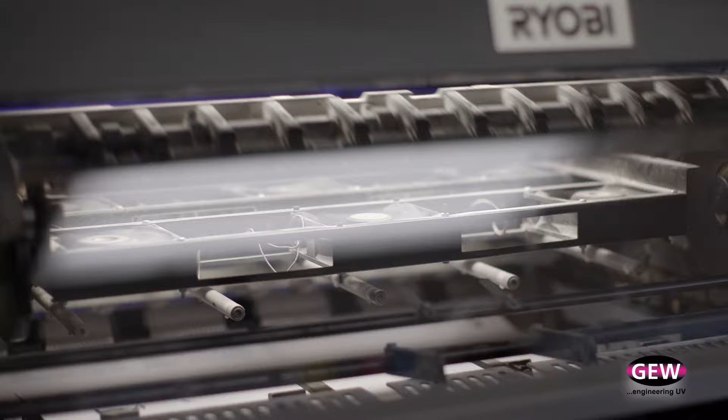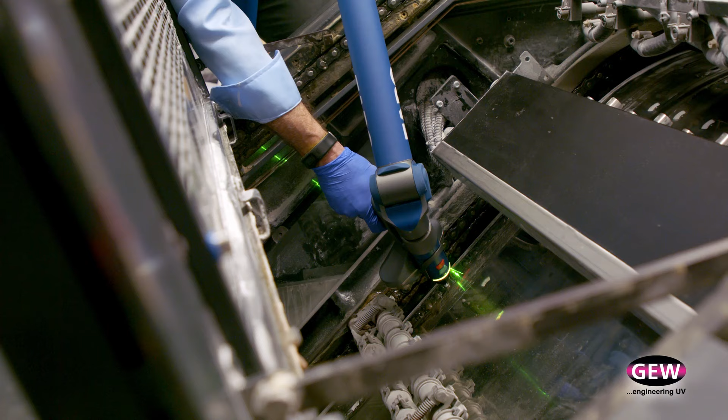In this video today, we're going to be looking at GEW's retrofitting process, and we're going to be showing you in a lot of detail the meticulous measurement, planning and engineering that goes into making sure every UV system retrofit is right first time.

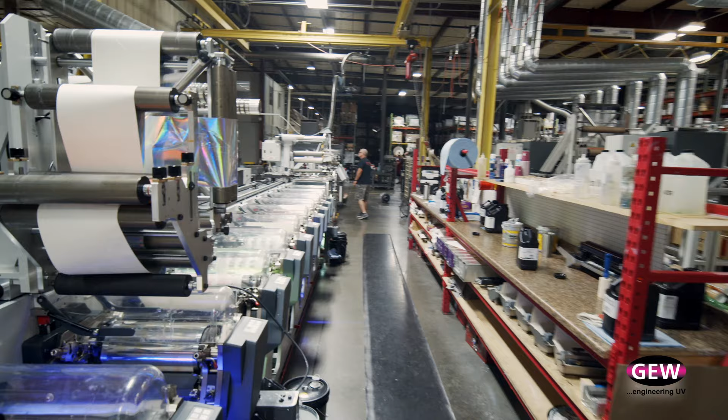At GEW, we understand that a new UV system can have big benefits for a customer's printing machine, but the installation process itself can be extremely disruptive and can cause significant downtime on a machine and loss of revenue. So GEW's retrofit process is designed around ensuring that the downtime on your machine is at an absolute minimum. We take a less haste, more speed approach so that we spend more time on the upfront engineering to ensure that the actual installation itself is right first time for you.

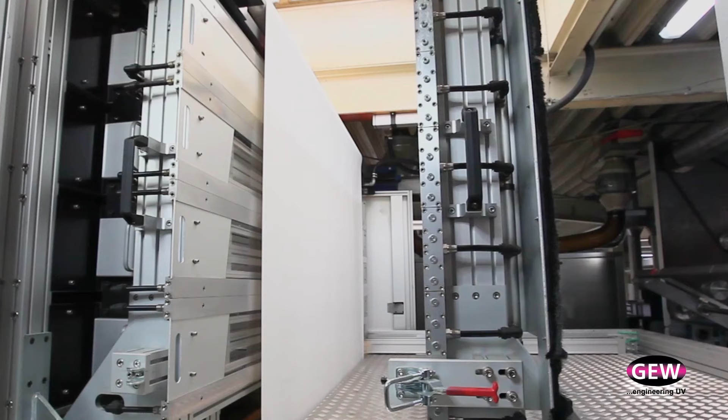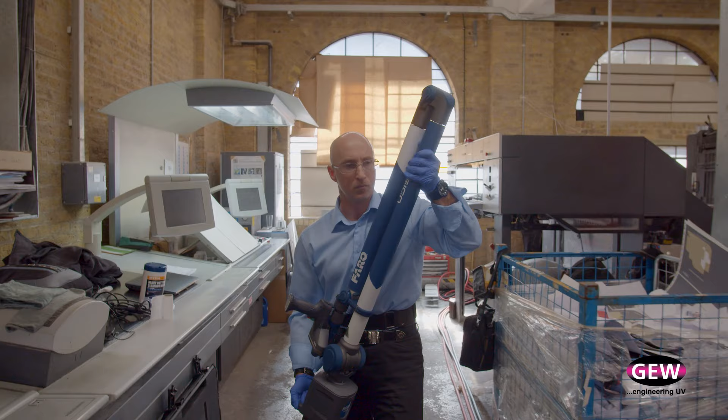After order, the first thing that happens is a GEW engineer from our site here will visit your printing machine with our portable coordinate measurement machine. The FARO scan arm, as it's called, is a laser non-contact measurement device that takes 2,000 points per line and has a measurement accuracy of plus or minus 25 microns.

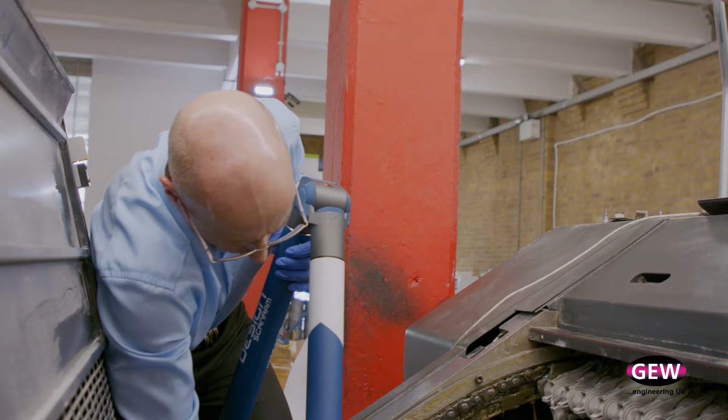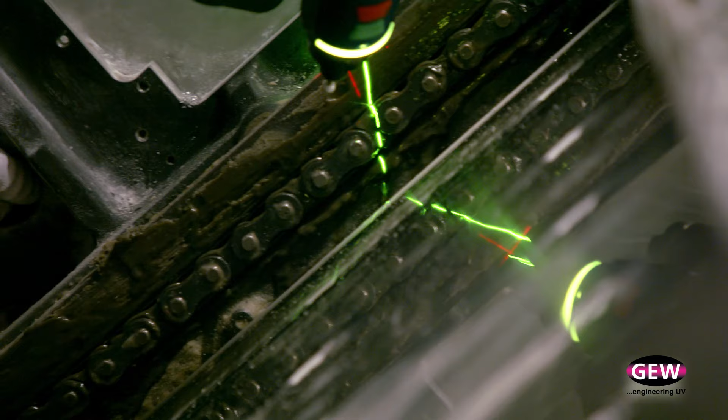The engineer will take that device and scan at high speed and with extreme accuracy all of the components and aspects of your machine which are going to be important to enable us to create and design a custom installation for our UV system. Once the scan is taken, which typically only takes a few hours, the engineer will take that 3D measurement back and convert it into a 3D model on his CAD system here at GEW.

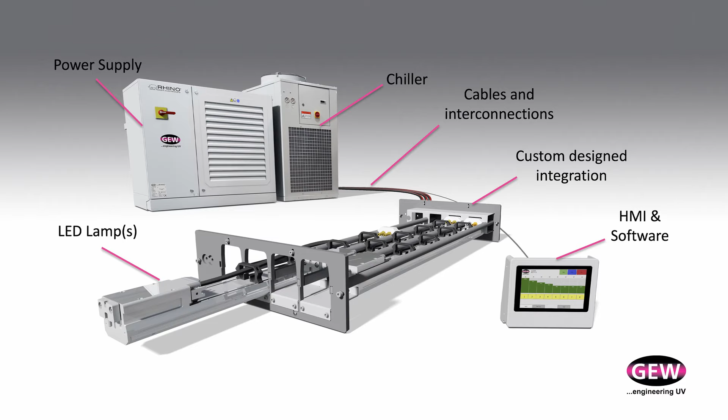A GEW UV system comprises generic components, things like the lamp head, our power supplies, our HMI, cables, cooling systems that we need to actually make the system work, combined with a specific mechanical integration for your particular machine. That mechanical integration kit is designed by our engineers using the 3D model taken of your machine.

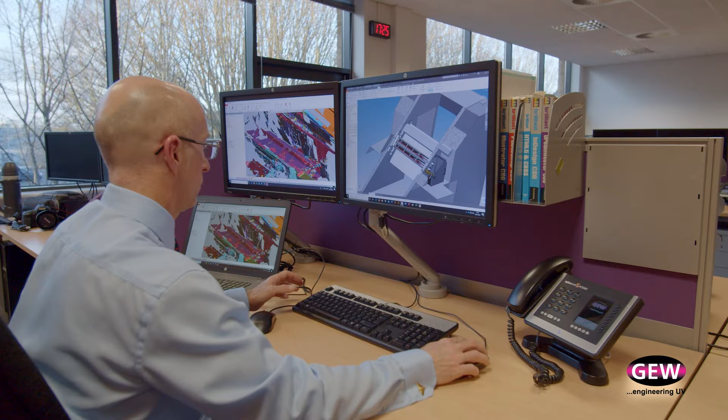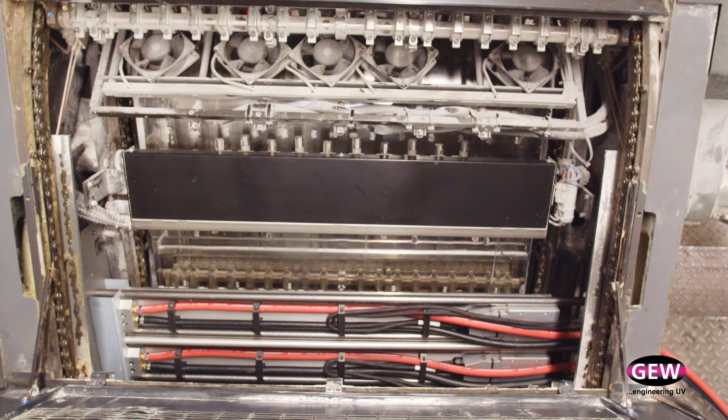Once the engineer has designed the integration for your machine, we take all the generic components, put them together with the specific integration components, and test them as one complete system in extreme detail here in our test department before it is shipped to you. That means when we get to site, we know that the system works, that all the components work together, and we can guarantee that the installation is going to be quick and successful on site.

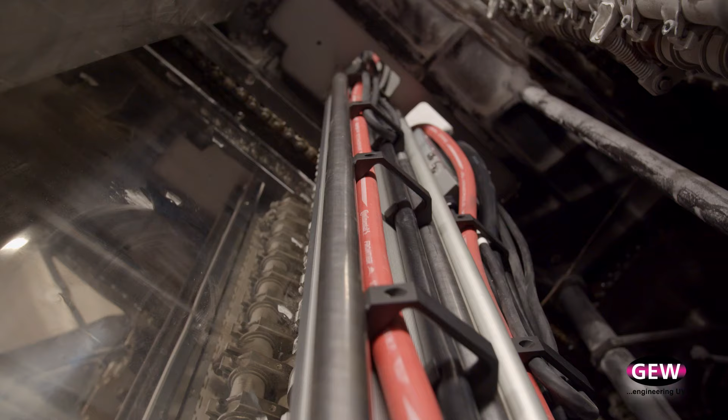We are monitoring your system live in real time. That means if there's ever a problem with your machine, our engineers can log onto your machine and see all the aspects that are important to ensure your press is running correctly.

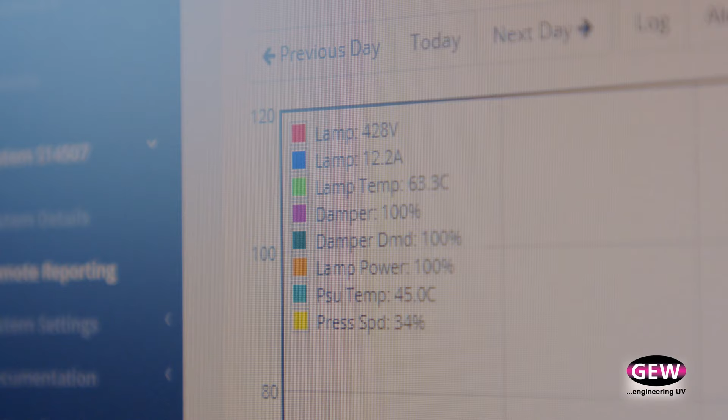What's the voltage of your lamps? What's the current? What's the temperature of the power supply? When did your press start? What speed is your press running? All of these components that we need to know to make sure your machine is running correctly, we can see remotely here at GEW.

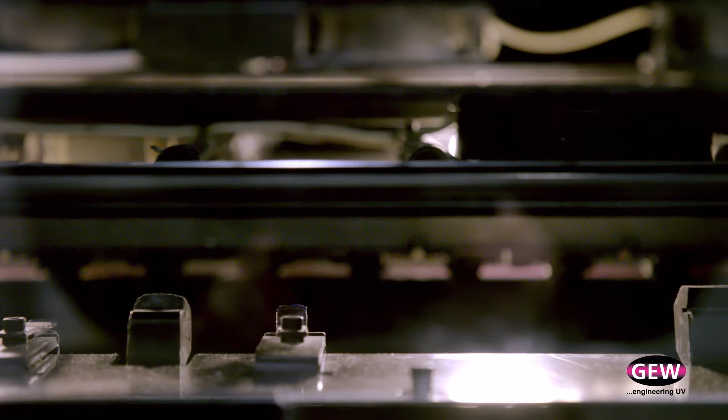And that ensures two things. Firstly, we can take proactive steps to ensure that you don't get downtime in the first place. But secondly, if you do have a problem, we can very quickly and easily understand what's wrong and take proactive maintenance steps without ever needing to visit site. We can do software updates, we can change settings, and this means our service process is much faster and more efficient for you, which again ensures minimum downtime and maximum productivity for your machine.

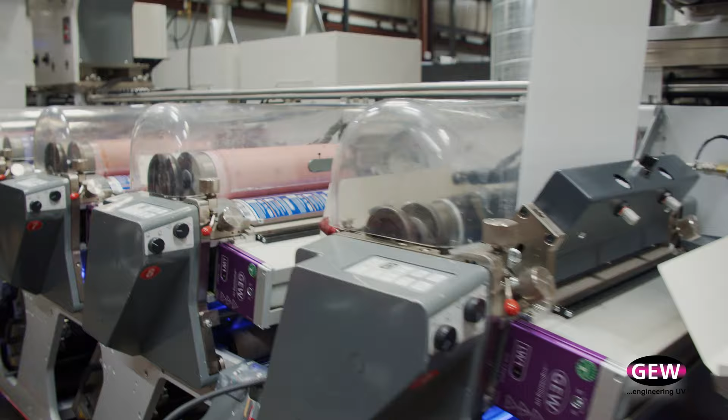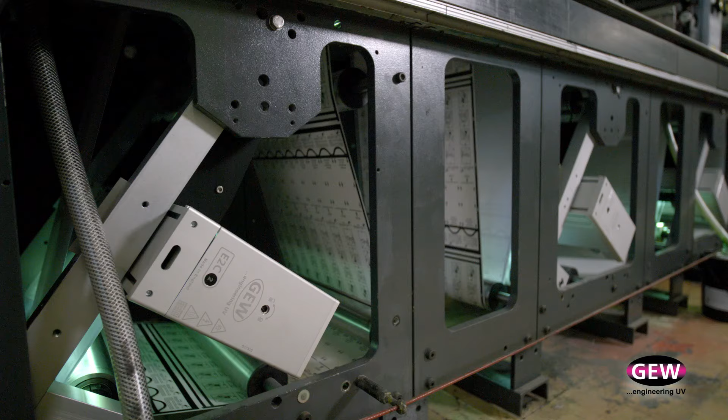Using this retrofit process, GEW is able to mechanically fit our UV systems onto almost any different printing press. You can see here a whole host of different applications and customer projects where we've been able to make a successful installation right first time.

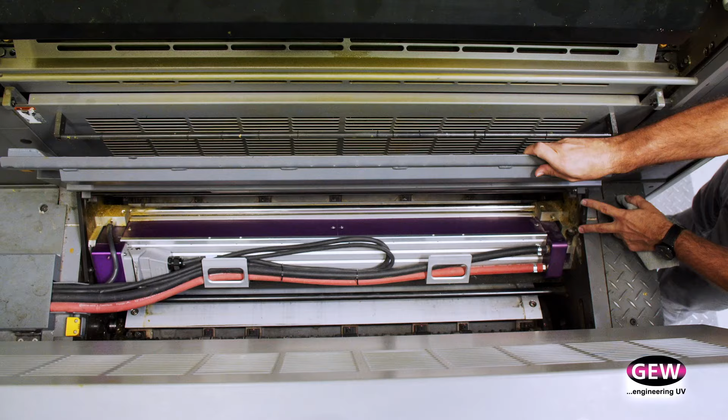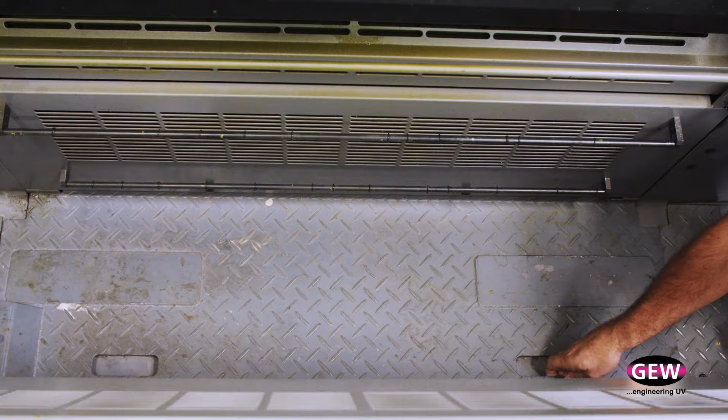We partnered up with GEW to come up with a solution to retrofit our existing press coming in. Their engineering and their attention to detail for us was absolutely amazing. The installation process went seamless. We were up in production within 48 hours. Their engineers were on site the entire time, and the fit and finish and their design made it flawless with the press. You wouldn't even know that it didn't come from the factory that way.

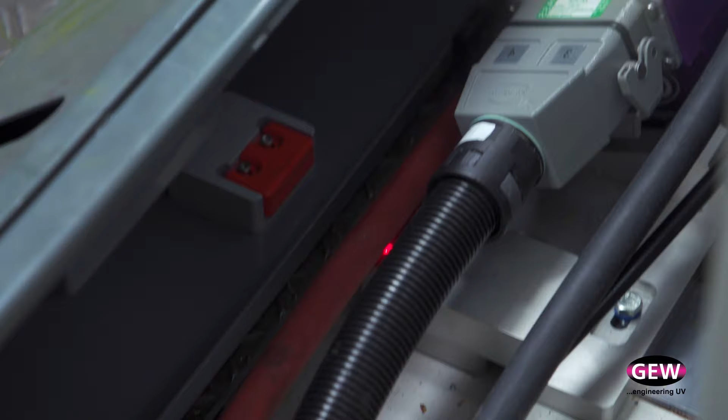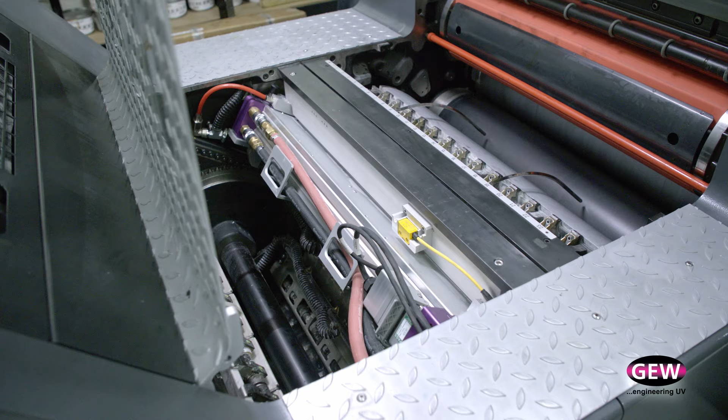GEW were here on time every time, and they were here when we needed them. I'm not blowing smoke here or kidding anybody. This installation was very fast—one of the cleanest installations I've seen in the 30 years of being in the printing business.